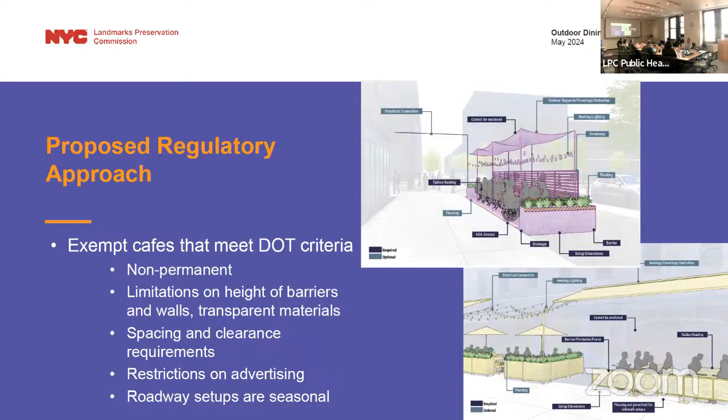As you saw at the hearing, DOT has extensive siting, design, height, and installation criteria for both types of cafes, as well as stringent limits on advertising. While sidewalk cafes can be up year-round, roadbed cafes can only be in place from April to November. Because of all these criteria and the seasonal, movable, and ephemeral character of the setups, neither sidewalk nor roadway cafes detract from the streetscape or significant exterior architectural features of the building. For these reasons, LPC's proposed rule would not require our review of sidewalk and roadbed cafes that comply with DOT requirements.

The proposed rules would still require LPC permits for aspects of outdoor seating that attach to the building or to historic paving, for compliance with LPC's current rules, and to make sure any penetrations and installations avoid damaging or concealing any architectural features. Elements that we would review would include awnings, lighting, conduit, etc. This type of regulatory approach mirrors our current approach to sidewalk cafes and also our approach to public pay telephones and Link NYC kiosks.

So now to address public testimony. There were several comments about outdoor dining setups that were raised and that LPC believes are already addressed by the proposed rules or by DOT's criteria. Quality of life issues came up, including noise, sanitation, and adequate access to sidewalks, and these were all noted at the hearing. These concerns largely fall outside of LPC's purview, but were the impetus behind DOT pursuing and adopting specific criteria for these setups.

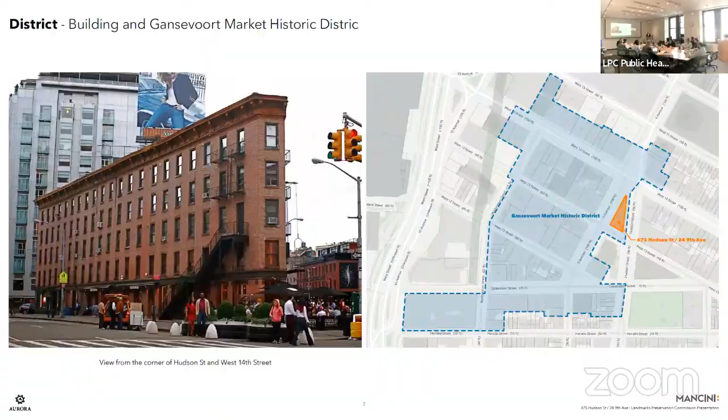The building at 675 Hudson Street, you can see in the historic district map on the right, bound on the south by 13th Street, on the west 9th Avenue, on the east Hudson Street, and then a small one-bay elevation, as you can see in the photograph on the left, on 14th Street, a prominent building on the edge of the historic district. An aerial view here illustrates its position, relatively low scale, but low scale in a district that is characterized largely by a lot of low scale buildings.

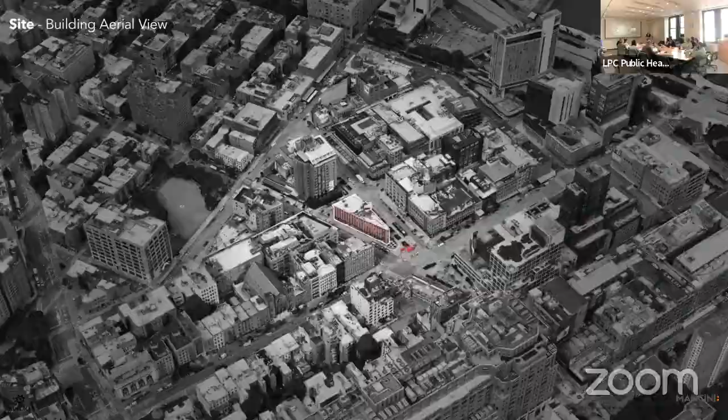Turning to two renderings now, of the previous proposal on the left and where we are today in our revised proposal. I'll remind the commissioners of some comments from the January public hearing. Significantly, there was a very consistent thought about the building becoming, quote, too sanitized, that there was a preference for more of a haphazard treatment to retain some of the messy character of the building. One commissioner noted that this building depicts the layering of time throughout the various elevations, and that was a positive.

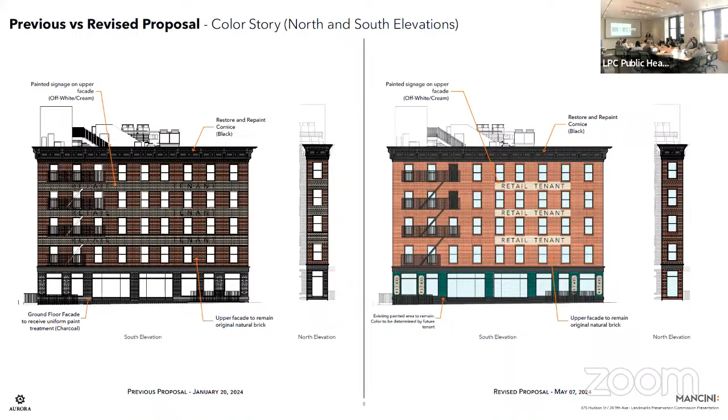The historic designation report for the district characterizes the evolution in four distinct phases: early development, the Gansevoort Market phase, the meatpacking district phase, and then finally the last phase, which is just called the present, basically 1970 onward. Each phase has a very distinct character.

The tenancy in the building in the late 19th and early 20th century were butter, eggs, and cheese distributors and other market uses. Then came the meatpacking district, characterized by a different sort of distribution tying into truck traffic and rail links.

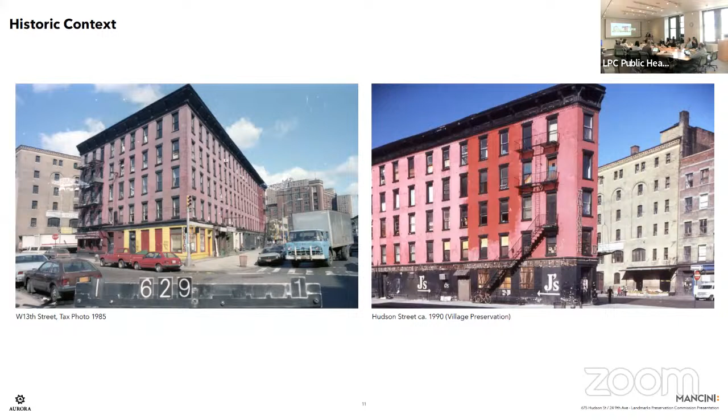The building in the 1980s had nightclubs across the base, had different uses on the upper floors. And of course, the vitality of the activity in the district was changing as restaurants were coming in. Florent came in the 1980s. It became a different place, but just as important.

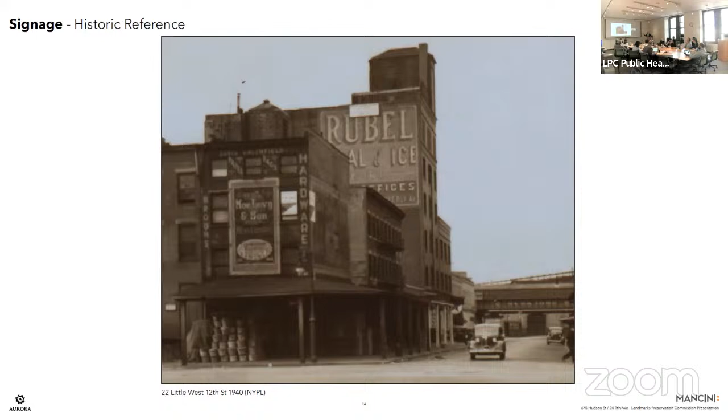And then this image here, looking west on Little West 12th Street. Obviously Rubel Coal and Ice, which was a major tenant in the neighborhood, had its giant wall sign on the side elevation, but more significantly, I think Mo Levy and Sons, this small scale building right on the corner, had painted signage both on the 9th Avenue facade across its entire facade, but also wrapping the corner on the Little West 12th Street side.

So wall signs existed on side elevations, but in this district in particular, wall signage extended across front facades, which was really about the activity that was going on in the district.

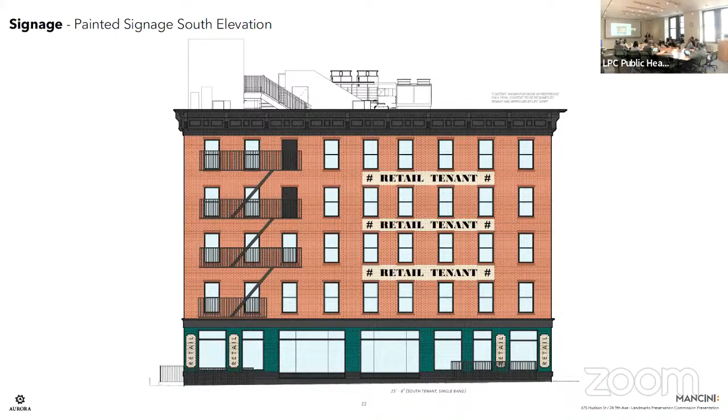Flipping around to the Hudson Street side, again, if there's a single tenant, the signage would be in this location, in each of these spandrels. One or two tenants, this arrangement. Again, one or two tenants, this arrangement. And then coming around to the 13th Street side, this is the exclusive arrangement. Again, prescriptive, limited, secondary to the overall brick masonry of the elevation.

And then finally, some specifics on the guidelines. So again, on the left are the specific guidelines and parameters for the wall signage on the upper portions of the facade, and on the right are the sign panels that would go in the piers at the base of the ground floor. So there are specifics about the dimensions.

On the left, a call out for the color, this Windham Cream, HC-6, which would be the back panel for the signage with a dark letter on that panel, specifics about its position relative to the lintels and sills above, and about the dimensions. And then on the right, the guidelines and parameters indicate either dark text on a light background or light text on a dark background to allow for contrast.

But again, to allow a little bit more flexibility at the base of the building as tenancies change. And then again, specifics about the positioning of those painted sections and the standoff from the jambs of the storefronts. So again, limited and also more prescriptive.

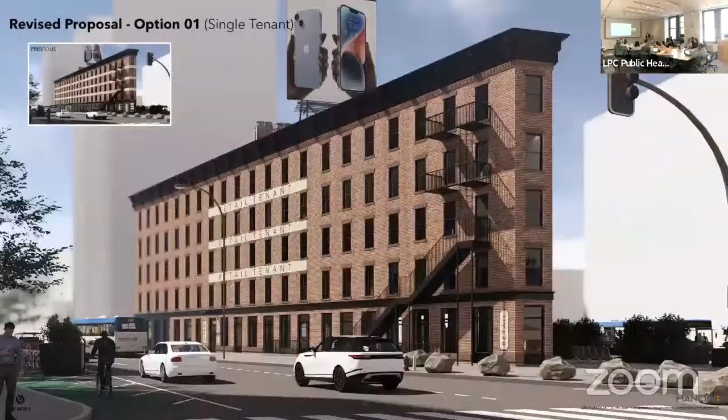And then finally, just a series of renderings going around the building. The little inset on the upper left corner is the matching view from the January public hearing, and then obviously the larger view is the current proposal. So looking south along Hudson Street, I think the reading of the building is primary here, and the interventions across the base are very much secondary, as well as those on the upper floors.

So this is a single tenant option here on the Hudson Street side, and again, a different color, just to suggest a range of colors across the base of the building that a tenant would be able to choose. And then continuing to the 13th Street side, so this would be a single tenant with 3 signs on each elevation. And then getting into the 2 tenant or 2 sign options here across the base on Hudson Street, on 9th Avenue, and then on 13th Street.

And then finally, the 3 tenant scheme, the 3 sign scheme with either a single tenant or 2 tenants, the view on Hudson Street, on 9th Avenue, and 13th Street.

So I think the changes that we've made have attempted to respond to your comments from January. Across the base, we've limited the amount of overpainting. This area of the building is currently painted, and that would be the extent of the painted masonry. We've reduced the number of enlarged openings, focusing them on the portions that face into the district on 13th and 9th Avenue, and we're considerably more prescriptive on the signage in the upper floors. All of this is an effort to reveal the layering of this building over time, but also to expose those changes and to introduce new ones in sympathetic and appropriate ways.

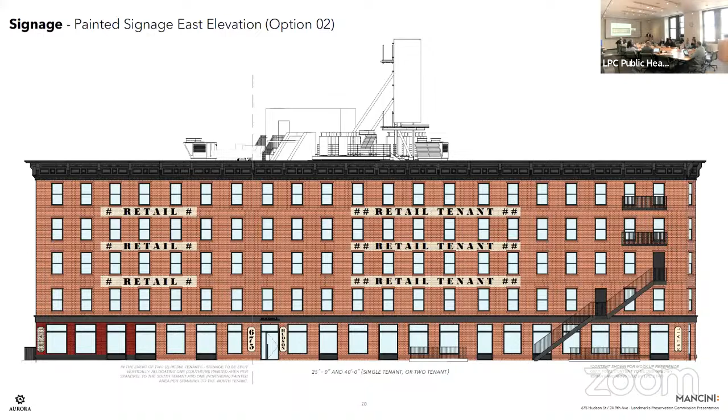So can you show me what that looked like? And also, are you sure you're going to get two tenants? It's likely one or two, likely more than one. So then one of the tenants can paint the bottom white and

the other could paint it green if they wanted. Is that correct? Could they paint their portion of the brick? None of the brick at the base of the building that is not currently painted will be painted. Okay, that was very specific. That was something you all felt very strongly about.

Right, back in here. So only the area here on 13th Street that is currently painted can be painted. Everything from this point north, which is unpainted, will remain unpainted. And down here on 13th Street, you can see it's actually a little more than what we're showing. So there's signage on all of these piers,

and here, and we're actually showing less signage than is there now, but this is sort of changeable painted signage, paint on paint, as the tenants change. And again, you all were very specific about what you wanted to see in terms of that signage, being good with it on brick down in the areas where it wasn't painted, and understanding that the southern 20% or so of the building, where it is currently painted, could be repainted. The idea is just to limit it to select areas relative to the tenants.

Got it. Okay, Vice Chair Bland.

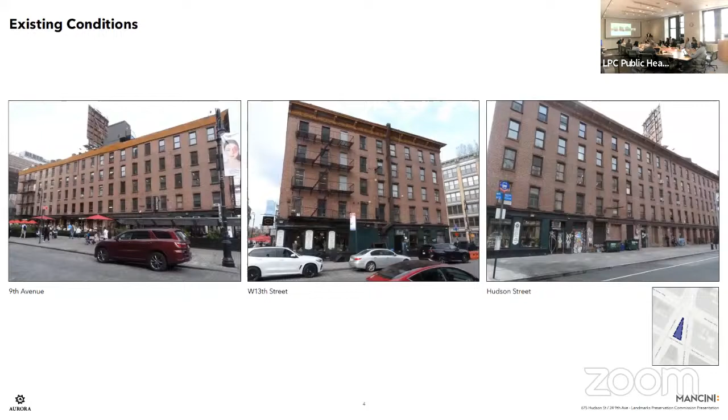Commissioner Ginsberg: One other thing, on the 9th Avenue facade, there seemed to be 3 entrances, and I thought the entrance for the above was not on the 9th Avenue facade. Am I misunderstanding that? So there are - this is the building entry.

Okay, so there's signage on either side, right. That's for this tenant space and this one. So that's anticipating 2 tenants, or at least 2 entries for 1 tenant. Yes, Commissioner Chen.

Since there's discussion about the sensitivity to sanitize a version, or the word 'messy' is the preferred term, or to regularize - does it make sense to eliminate the top band? Because right now you have this very modular, regular 3 bands across all the facades, which make it very, very symmetrical. Does it make sense to have the sign bands only on the lower 2 floors, the lower 2 bands?

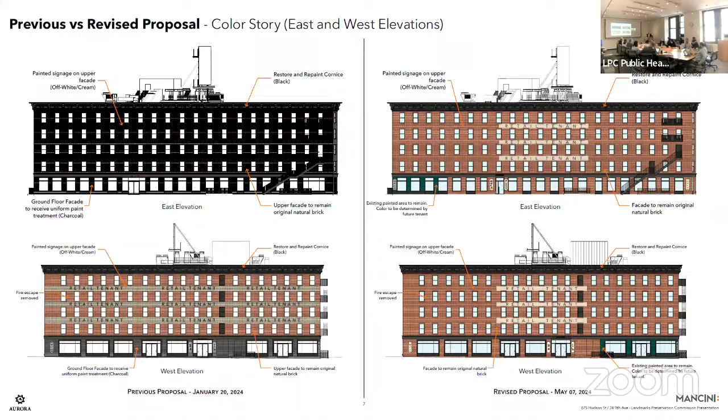I'm not sure that I agree that it regularizes things, and I think in this scheme where there are 3 signs - let me just go to the 2, sorry. I think the asymmetry of this actually adds a little bit of life and, let's say, messiness. So I think these signs, the way we've revised this now, are, in my eye, really secondary to the reading of the elevation. I think they will continue to be so, as a feature added to this field of brick. So I'm not sure that the 3 signs and the single tenant arrangement creates a sanitized reading.

I think you read the building and then it happened to be signs on it.

Following up on that, if a single tenant wanted to do option 2 or 3 on 9th Avenue, could they still do option 1 on Hudson? Or do they have to, like, is option 3 on all the facades?

Hadn't thought of that, but that's a good suggestion. I'm sure we'd be happy to do that because it actually allows for more flexibility. So if they wanted 3 signs on Hudson Street but 6 on 9th Avenue, we would certainly be fine with that.

Right, or maybe you can't have option 3 on all sides or something. Okay, other questions?

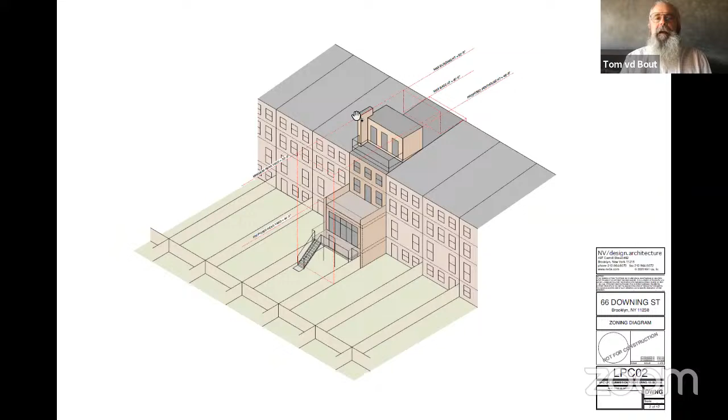So this is a little axon overview of what's being proposed. This is a view overlooking the rear yard. We have a penthouse on the roof and a rear yard extension of 2 stories. None of this, by the way, is visible from the street.

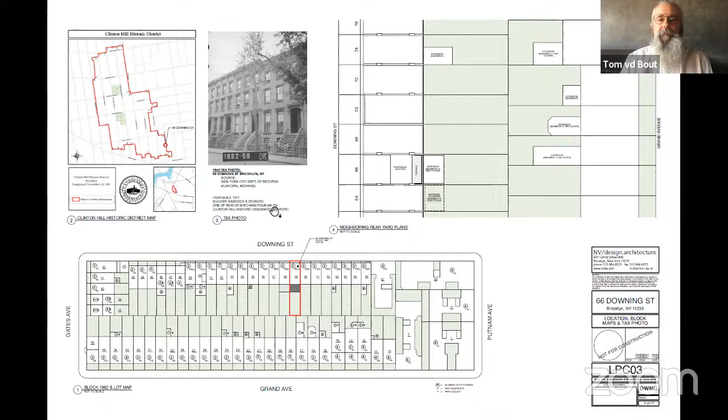So this is the house in question. It's mid-block on Downing Street. There is a row—it's the first in a row to the right on the screen of a long row that matches, and then there's a slightly different row going to the left on the screen. Across the street is a large schoolyard and school, and we're on the edge of the district here.

Our proposal extends the building to align with a proposal that was approved a couple months ago, I believe, maybe 3, for a rear yard extension at 64. So if and when that gets built, our extension would align with that one.

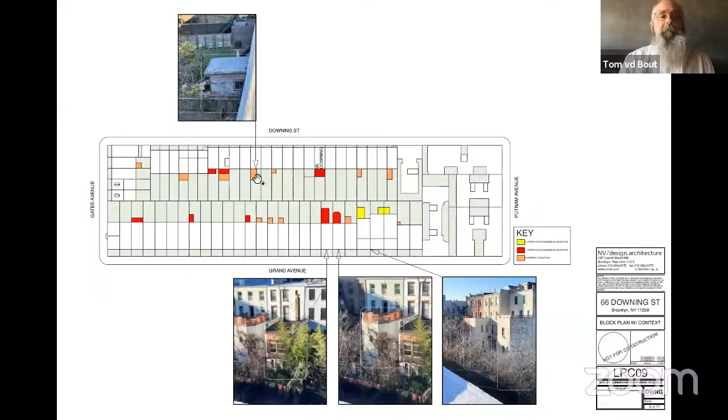So these are the views across at those extensions, which are 2 and 3 story, and then north to there's a couple that are deeper, but are lower further to the north.

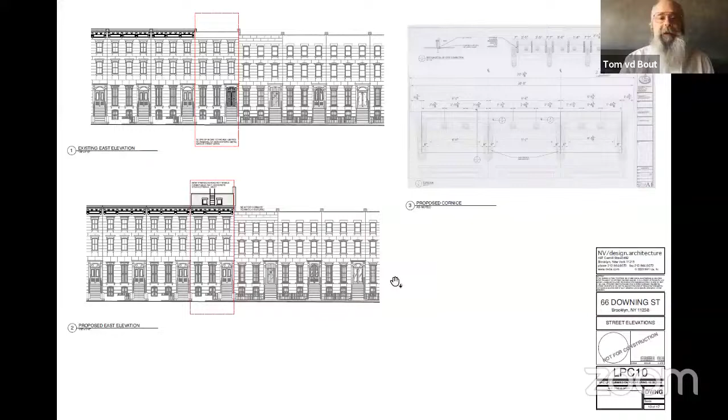So on the street facade, this is all being handled at staff level—the changes—but we're restoring a cornice and taking off the non-historic gate at the entryway at the top of the stoop. Nonetheless, the elevation here is set back. You can't see any of this, but there are 2 windows, the fireman's access, and the facade itself.

The rear yard elevation, where you can see the outline of what was approved but is not built—that elevation we're aligning to in terms of depth—and removing this portion of wall, putting in a big set of window doors, a couple windows at the back.

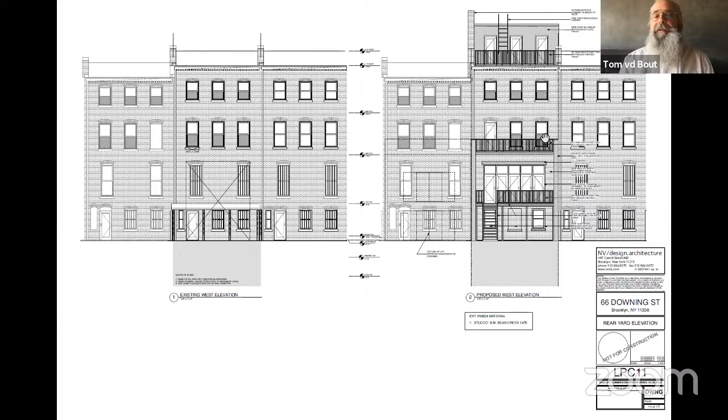We're hoping to reclaim the brick that we take out of the existing and build the wall with that reclaimed brick if we can. At the top, this is essentially a simple gray concrete stucco penthouse with 3 doors to keep it as light as possible.

That's the same thing, a little bit closer. One window expanded to a door for access to that terrace. And that's it—these are visibility studies. You cannot see any of it. You couldn't see the mock-up from the front.

This is showing the extent of our proposed rear yard addition.

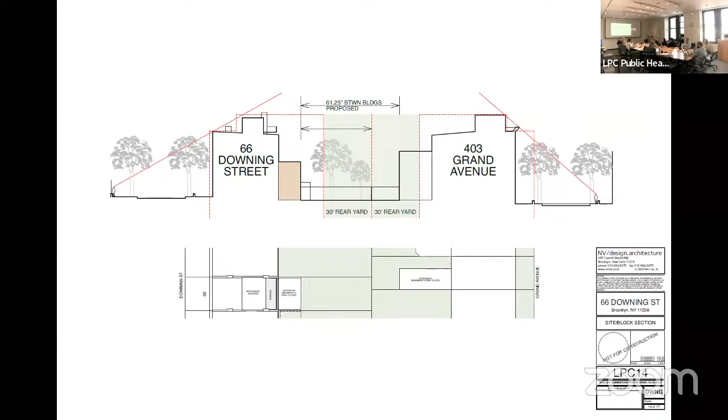And I think in that section, though, you were showing that you still have a more than 30-foot rear yard because the Grand Avenue extension is deeper than would otherwise be allowed, but we still maintain over 60 feet of rear yard space, the sum total. So it's still, we're trying to keep it pretty open.

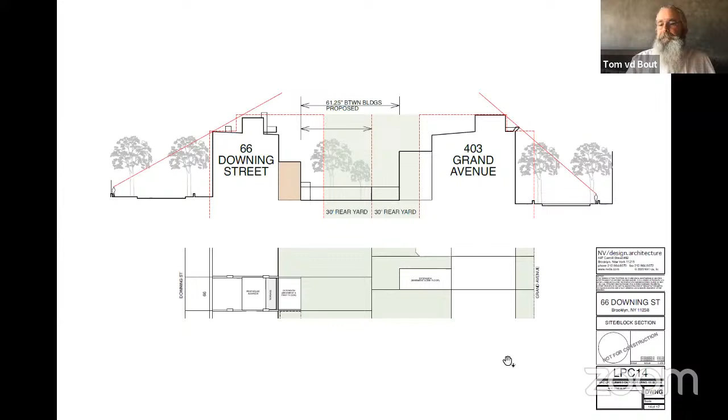Thank you. Any other questions? Commissioner Chapin, followed by Commissioner Gold. Are there other rooftop additions on this block? There are not. Across the garden, there's some higher buildings and assemblies of things on the roof, stair bulkheads, solar panel arrays, that sort of thing. But on this end, you have to go all the way down to the other end to find a stair bulkhead.

Okay, thank you. Commissioner Jefferson. I just have a material question. Under section LPC 07, you call out stucco, new concrete stucco wall. Is this CMU you're using on the walls? Yes, on the cheek walls. Okay, thank you.

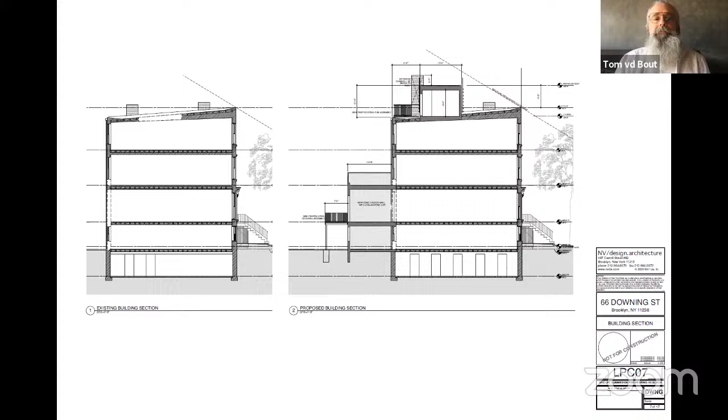Okay, any other questions? All right, let's move to public testimony. Is there anyone in the room who would like to speak on this item? Not seeing anyone, I will turn it over to Gregory Kala to see if we have any remote participants. Thank you, Chair Carroll. I do not see any remote participants with their hands raised. If you would like to speak on this item, please click the raise hand button now. Okay, none of the hands are raised.

I will just note for the record that Brooklyn Community Board 2 recommends approval with the suggestion that a cornice be added to the building in line with that on 68 Downing. We also received a letter recommending approval from the Citizens for Responsible Neighborhood Planning of Clinton Hill and Fort Greene. And I will bring it back to you, Chair Carroll.

Thank you very much. So I think the testimony was supportive. Is there any final comment you'd like to make before we begin our discussion? I think, no, I'm fine. I was just unmuting there.

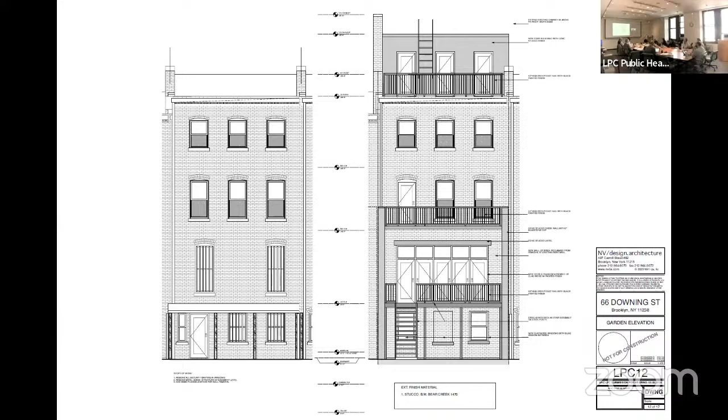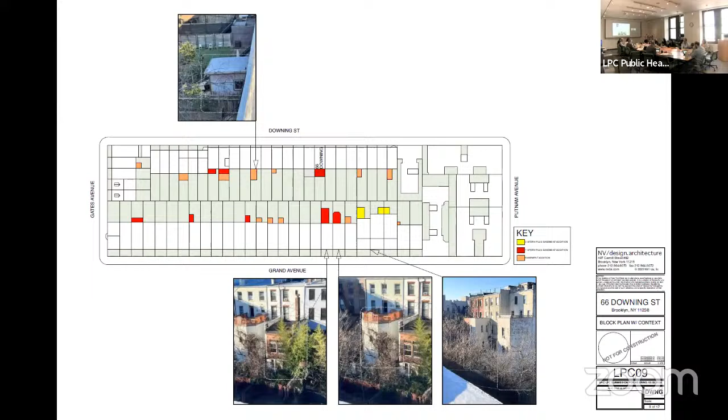Sorry, I am just looking at the aerial photo of the block, and I know that there have been some applications where some commissioners have been concerned about approving a rooftop addition where one doesn't historically exist. But I want to remind everybody that the rule would allow, if this were coming in just for a rooftop addition, the rule would allow the staff to approve a rooftop addition, even if none existed on the block. And so, understanding that sometimes this issue does come up, I want to note that looking at the aerial photo, it does seem like there are a variety of building types and heights, and some rooftop accretions like bulkheads, but also some partial top floors that kind of read as additions. So I don't think it's as pristine as some other places where we've discussed this.

But I don't know, Tom, if you want to add anything to that roofscape analysis. I think that's right. You can see, especially toward Putnam Avenue, it becomes extremely varied and grows in height. And we did design our proposed penthouse to comply with all of the landmark rules for a staff approval. We just got caught doing the rear yard addition too.

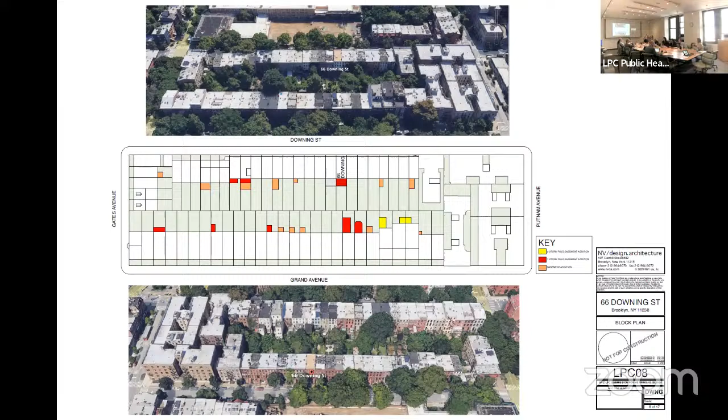Right, so really the reason the rooftop addition is before us is because it's being proposed in conjunction with a rear yard addition, and so we look at the cumulative effect. Okay, so let's close the hearing and begin our discussion. Commissioner Jefferson, would you make a motion to close the hearing? So moved. Thank you. Commissioner Chapin, would you second that motion? Second. All in favor, say aye. Aye. Any opposed? Okay, the hearing's closed and we'll begin our discussion.

This is an application for both the rooftop and rear yard addition. Neither are visible from the public way, and we're reviewing them because the staff is not authorized to approve one where there's another approved or requested addition. And so we're looking at the cumulative effect on the building. I think also the number of two-story additions is smaller than is required for a staff approval.

But the applicant has shown us that there are other similarly sized additions. In addition, we've approved a two-story addition on the adjacent building that projects as deeply as they're proposing. And also the Downing Street side of the block has much deeper rear yards than the other side, the Grand Avenue side of the block, which can also be taken into account.

All right, we'll start our discussion. Commissioner Chu, would you like to start this one?

I see this proposal as perfectly appropriate. The cornice is in fact listed on the drawings to be added back, so that is part of the proposal. I think the rooftop mass is pretty minimal, and considering the other types of heights in the block, I think it's acceptable. In terms of the addition, these houses on this block have smaller house depths than Grand Avenue. The addition will do a lot more for them in terms of adding needed area, and they're not even using the full depth of the lot that's allowed. So yes, I think it's appropriate.

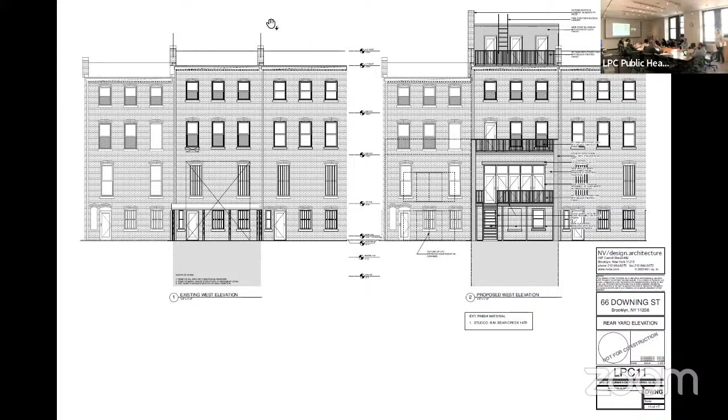So that's approved. Thank you. We'll move to the next item. Next item is public hearing item number 2, LPC 24-08873.

An application for a certificate of appropriateness in the Borough of Brooklyn, Block 5115, Lot 1, 1100 Albemarle Road, aka 101 to 113 Stratford Road, in the Prospect Park South Historic District. This is a neo-Georgian style house designed by H.R. Ferguson and built in 1909 to 1910. The application is to construct porches, alter facades and openings, connect the garage to the house, and place paving at the driveway.

Morning, everyone. Good morning. We're here today to present to you 1100 Albemarle Road, at the southwest corner of Stratford Road. The Wilsons are here — Summers, Andrew — this is the Wilson family home, they're currently living there. They bought a fixer-upper, and we're thinking through what the plans are.

Can you hear? Oh, we're having trouble. All right, got it. Can you hear now?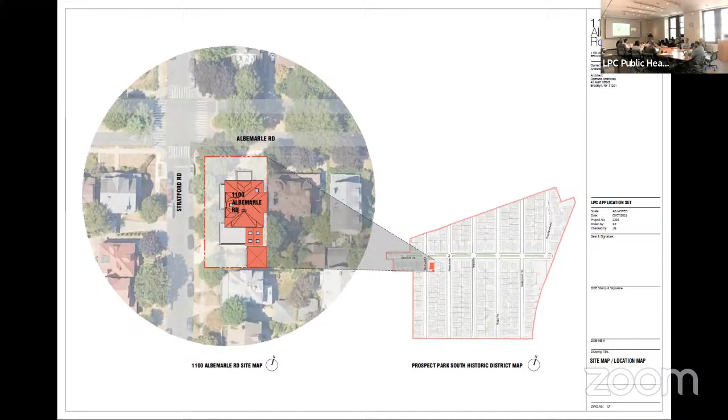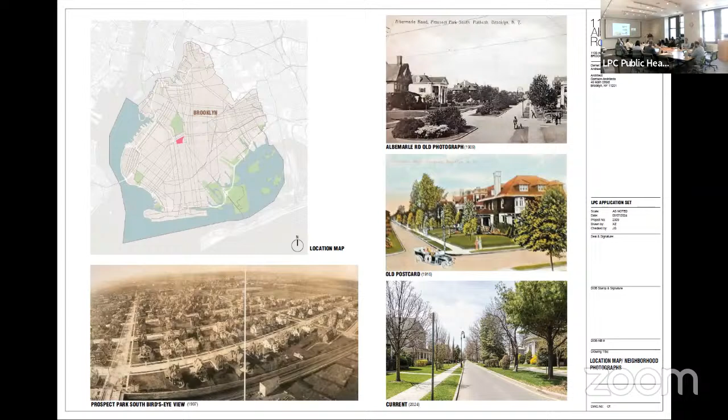All right, so here's the house shown at the corner of Stratford and Albemarle. The red zone is the original house. You can see the extents of the lot, and the district — I imagine you've seen all kinds of houses in this district over the years, so I won't go on about that. But here's a bit of context, and in that center image on the right, almost the house we're looking at, although not quite the same — but the character just goes to the character of the streets and surroundings.

This is the house in its current condition. You can see that certain pieces and parts are listing a little bit. That porch was rebuilt from the original porch, put up with fewer brackets than the original had. It's a neo-Georgian house, a little high-waisted at this point because the bricks come up quite far on the elevation without its porch. But if you look closely, you can see all kinds of things are displaced and canted and in need of work. Every surface is in need of some attention.

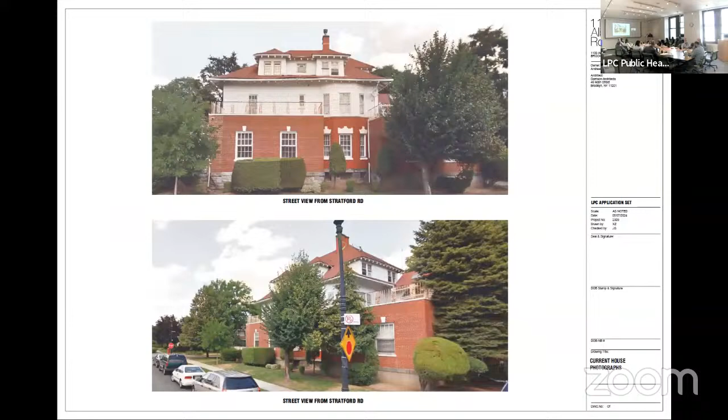In the 50s, there were a series of additions made. The porch was replaced with a brick bump out, and some openings were made in the wall of the original house, and that's what you see here.

More images, Stratford Road crossing. Brick additions.

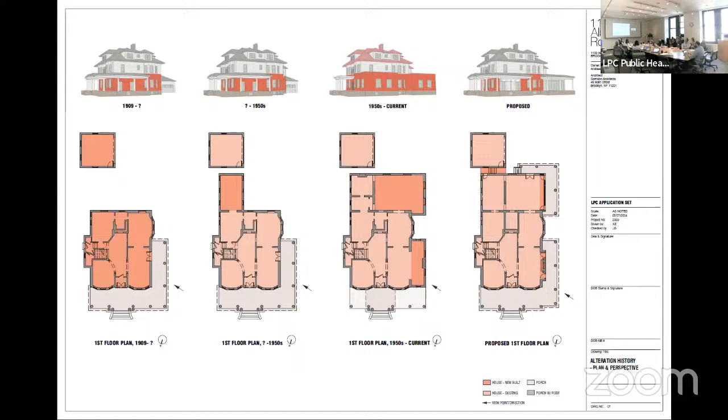So the existing house on the left, the blue shows the removals, the demolition. The right shows our proposed porch restoration. We set the corner of the porch back a bit to restore the symmetry.

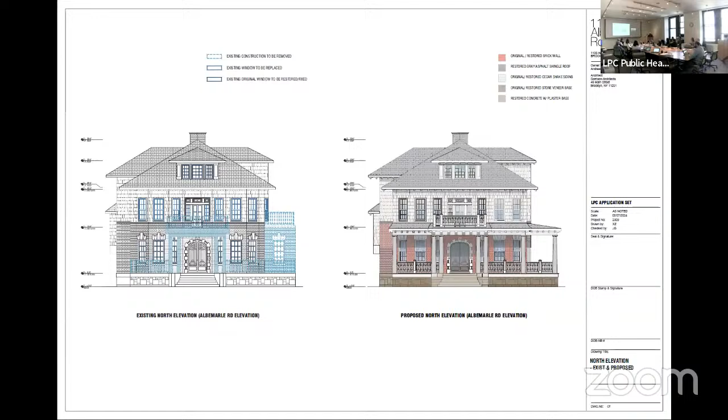Again, the same business with a bit more detail and in plan. You can see the existing porch on the left is the red at the bottom. The brick boxes show at the left-hand side here, and we're basically removing them, doing work to the back edge, and then doing work.

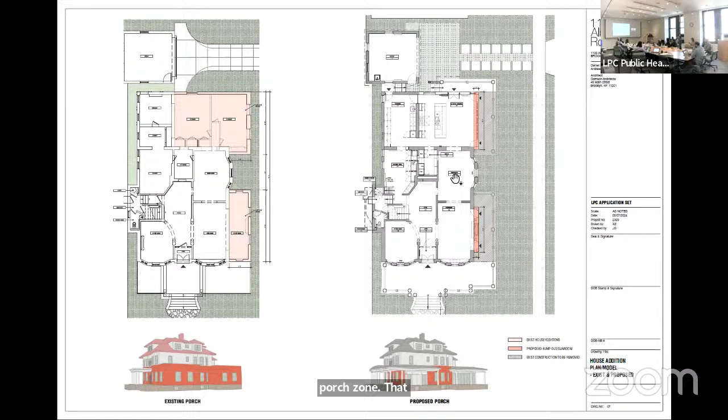Again, more detail. You see these are the projections into the porch zone that we are proposing, a bit more space for these rooms. You see the dining room has a bit of a bay, which helps it a bit. This is about 13 feet.

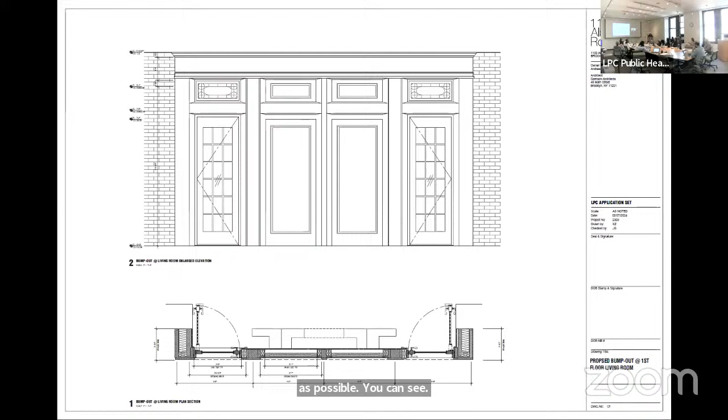Details, which I'm sure you'll want to see, but the basic construction of the porch roof in the traditional manner, using historic components that match as closely as possible - you can see in our photos. The projection at the living room, containing a alcove fireplace, is similar, and the solarium windows at the kitchen, which are double glazed and top of fixed light.

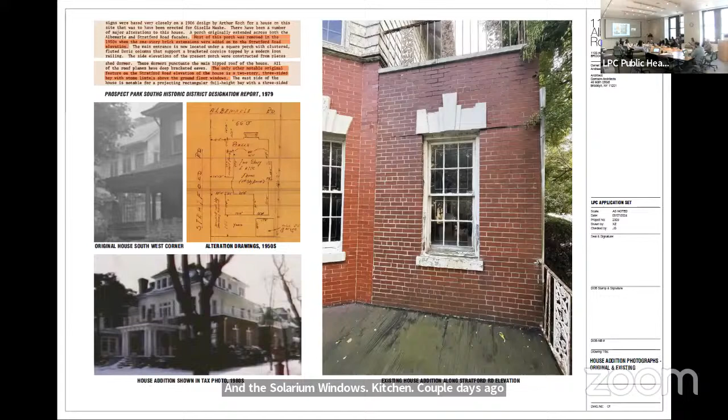So here you can start to see the condition of things. The lintels are rusted, the brick's displaced. This is all on its last legs. The water drainage system for the house, of course, cut off, pouring around foundations. It's already been hard at work to restore that.

We talked a little bit about the business of the bump out and the solarium and so forth. It is something that we see commonly throughout the neighborhood, a variety of modifications.

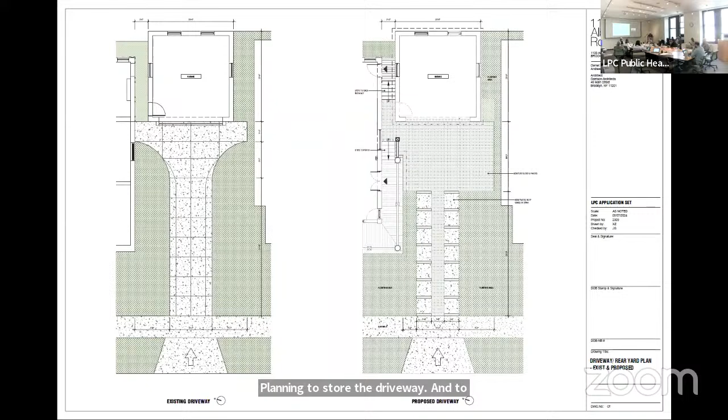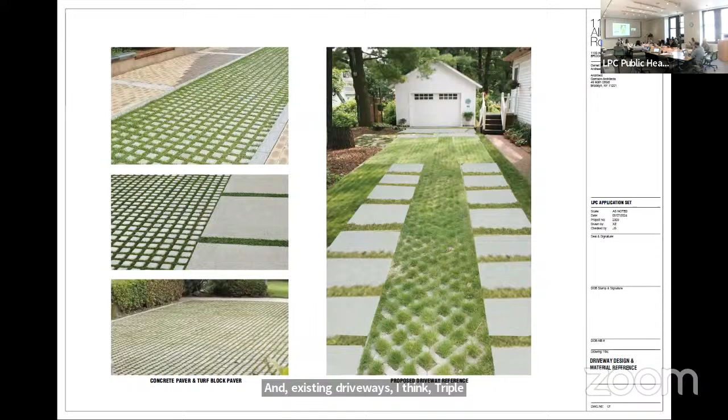We plan to restore the driveway and two concrete block pavers leading to a grass block central area. Driveway as it is, various driveways, historic examples on the left, tracks, and existing driveways. Our plan is to use grass blocks in combination with these blocks, so it becomes usable for a variety of things.

And the elevation, this is the south elevation of the house. This is one of the 1950s additions. We're going to keep some of the framing, but we'll take the extension away. We'll do a bit of work on the windows. And what we show is wrapping the porch partway back.

The garage starts about here, and we would make a glass, wire glass connector, what's called, between the garage and inside the house here. Place a door here, so we can basically come out of the house, undercover, and into the garage under the glass. Here's an example of the kind of thing that would be. It just goes basically edge to edge, upseal.

And some more of the drawings here showing the detail of the house, the lime brick mortar, beautiful original brickwork.

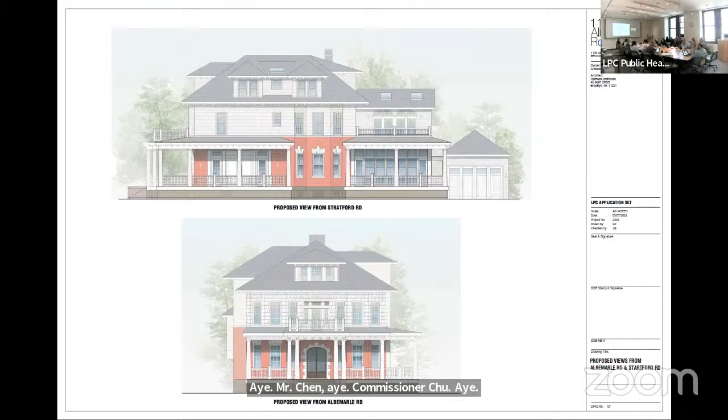Second. Chair Carroll, aye. Commissioner Bland, Commissioner Chapin, aye. Commissioner Chen, aye. Commissioner Chu, aye. Commissioner Ginsberg, aye. Commissioner Goldblum, Commissioner Jefferson, aye. Commissioner Lutfy, aye. Commissioner Master, aye. With 10 in favor, none opposed, the motion passes.

All right, that's approved. Thank you very much and good luck. And we'll move to the next item.

Next item is public hearing item number 3, LPC 24-08399, an application for a certificate of appropriateness in the Borough of Manhattan, Block 231, Lot 1, 301 Canal, 419 to 421 Broadway and 423 Broadway, all in the Soho Cast Iron Historic District. A taxpayer built in 1955, a restaurant and shop, and a modified federal-style store and dwelling built in 1822 to 23. The application is to demolish 2 of the buildings and construct a new building at the corner, and to construct an addition, install the storefront and signage, and modify the fire escape at 423 Broadway.

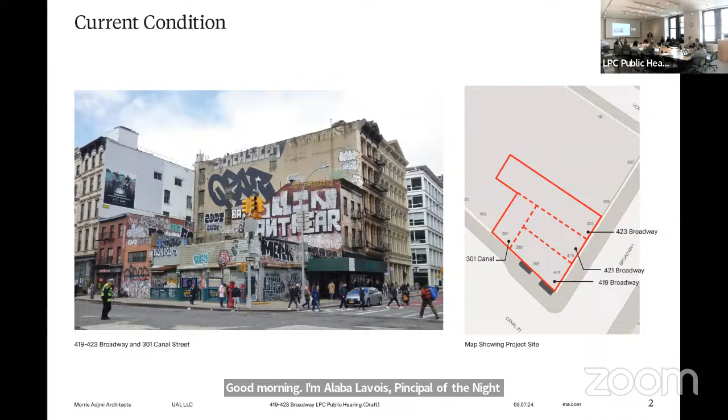Hi, good morning. Albert LeBose, principal of United American Land. We have this site, we bought it pre-COVID, and we designed this beautiful building, a Morris Adjmi design.

And since it was pre-COVID, unfortunately we designed an office building. I don't have to tell you where the office market is and where the financing for the office market is. So I'm kind of embarrassed coming back here to say, hey, we have to change gears and we can't build this building. We have a very big interest in Canal Street on a couple of the corners and other properties, and this particular site has been blighted for a while.

So we thought, let's go ahead and build something as a placeholder, like a one-story, beautiful, gorgeous retail building that we can all be proud of, and come back and fight another day when the market comes back and we figure it out somehow. With the rezoning, people ask me, why don't you do resi? But given that the site is pretty small and constrained, interest rates are where they are, and soil conditions and all that, it doesn't make economic sense for us at this moment to do a resi building. So with that, I'm going to turn it over to Erin. Thanks.

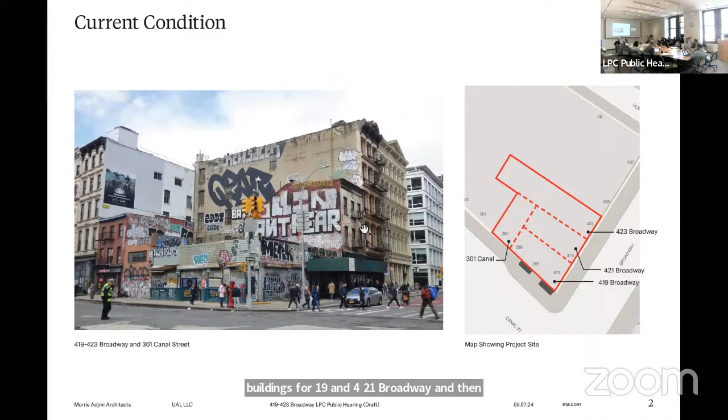Morning, Commissioners. Erin Ruley, Higgins Quasebarth and Partners. So what we're looking at today is 419 Broadway. It's actually a collection of 4 buildings that are an assemblage. It includes 301 Canal Street, this two-story orange brick building, the one-story commercial structure on the corner which was originally two buildings, 419 and 421 Broadway, and then 423 Broadway, which is a three-story late federal period building that was converted and added onto in the 1860s. They all occupy the northwest corner of Canal and Broadway in the Soho Cast Iron District.

As Albert introduced, this was the approved project in 2017, a commercial 8-story commercial building. It was a special permit project because that was prior to the Soho rezoning, and it was a 74-711. It included the restoration of 423 Broadway, which we see right there. That project was not realized, and the permits expired in December of last year.

So what we have today is a proposal that essentially reclads the existing lower structures, the 419 and 421 buildings and 301 Canal. Those were buildings that were approved for demolition under the prior application, and the design is inspired by the cast iron bases that we see throughout the district.

And it's a very typical Morris Adjmi play on the historic features: fluted columns, projecting storefronts, and decorative patterning. 423 is also part of the project, remains part of the project, and that'll be restored largely in the way that we had proposed under the 74-711.

New commercial storefront. It'll have a continuous commercial space with the 419 building. The upper two floors will be converted for residential. There's a rear extension, two stories, that will be preserving the pitched side wall of 423, and the addition is set back slightly so it slides behind the plane of the brick that you see here.

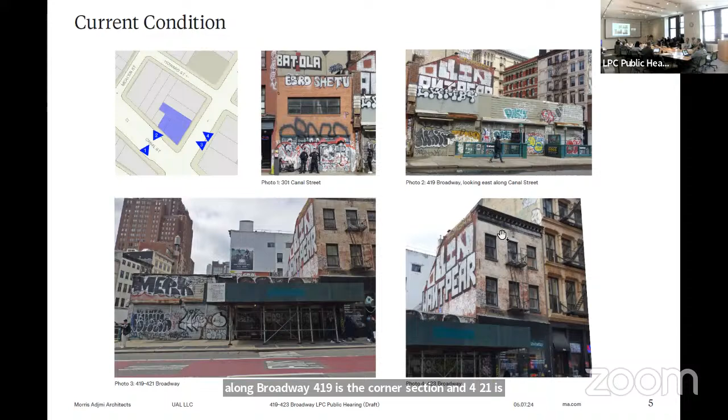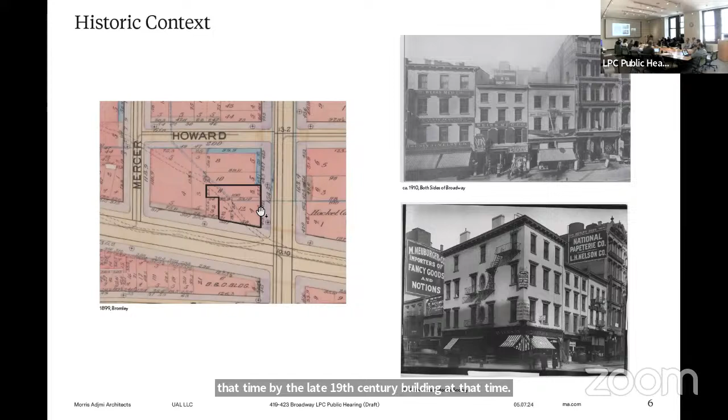The buildings started out as 4-story Italianate structures in the mid-19th century. You can see this is 419, this is 421, and this is 423. In this corner view, we have that same perspective, but it also includes the original 301 Canal, which was a 2-story mid-19th century building at that time. By the late 19th century, 419 and 421 had been combined on the interior, and so we see that in the map from 1899 - it shows it as a single footprint.

In the 1950s, 1953 to be exact, the upper 3 floors of the 419 and 421 buildings were demolished, and it was left with a converted base that gave us the condition that we have today. So storefronts all along Broadway and Canal, and then the span, what had been the spandrel became the parapet, and clad over in a series of metal and contemporary finishes at both of the buildings.

In the background, you can see 301 Canal. In 1966, that building was entirely refaced, and all of the interiors really date to that period as well for that building. And then, of course, this is the designation photo. So in the early 70s, the district is designated, and this is the condition we have had since then.

In 2017, the commission approved demolition of the 419 building and 301. These are current photos, but also probe photos that we included in the 2017 package, to explain the conditions of the buildings. And the commission found at that time that the buildings did not bear any resemblance to the historic buildings that were originally there, and that there was no significant historic fabric remaining at the buildings.

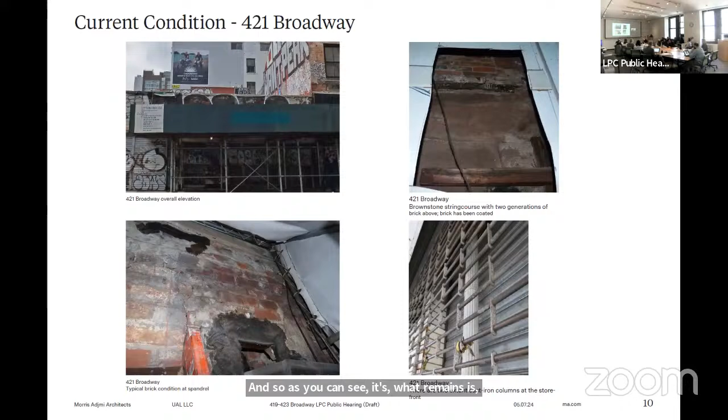And areas of brownstone, fragments of brownstone that remain. There are two cast iron columns within the opening of that bay, and these would have been interior columns within a projecting storefront. So largely the same condition that we see at 419. As you can see, what remains is compromised and fragmentary at best. All of this was the same content that we presented in 2017 as part of the original proposal.

So just stepping back to the site to consider how to think about developing a new one-story building. It has been so long occupied by a one-story building, and how it might engage in the conversation that currently goes on. So we looked at the corners throughout the district and how they evolved.

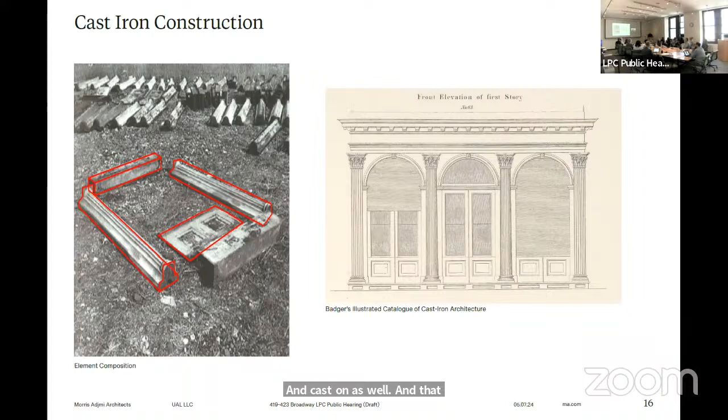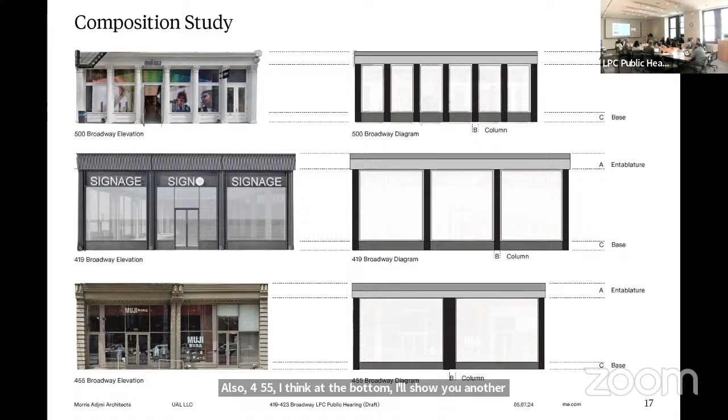We did some studies of other buildings, just the base spacing, and also the one in the center is our project, which has about 18 feet 8 inches base spacing on Canal, and 17 and change on Broadway. Also at 455 at the bottom, I'll show you another image of that, which had projecting storefronts originally, similar to what we're doing, but those were heavily modified.

And then here's some images. So the model is circulating. We looked at this as just a series of bays that had columns and a beam or entablature, and rather than replicating existing cast iron architecture, we looked at the architecture as a way to inspire us.

No? Oh, okay, I'm sorry. It's okay, it's all right. Yeah. We'll put it back together.

I think it really helps to see the depth of the facade and the articulation, and also the components, which is something that we felt was important. Even though this is a small building, we put a lot of care into how all the pieces went together, and we think that it addresses the appropriateness issue through that attention.

Here's the column concept. We looked at catalogs, images, and architecture in place, and came up with a modified fluted column, which has a folded section. All of the metal in the building we're proposing to be cast aluminum with a paint finish, which would replicate the sand finish that you would see in cast iron.

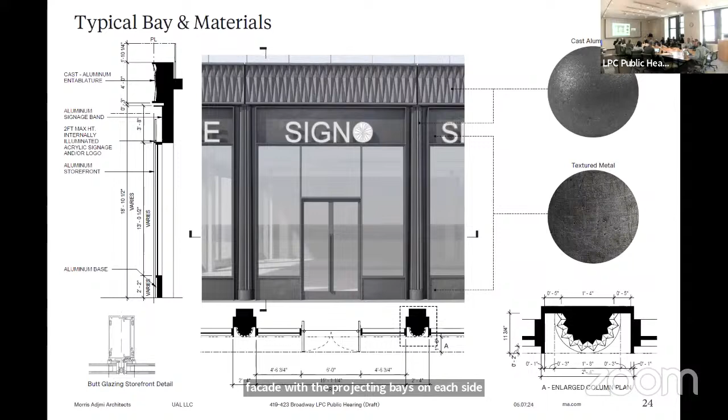One of the things that we really wrestled with is that we first looked at this as a 3-story building and then a 2-story building, and all of the vertical circulation that was required was really knocking out a lot of the usable floor area. So we landed at 1 story. We're trying to find the appropriate height.

And that's the proposed design. Karen's going to give us a little more information about the 423.

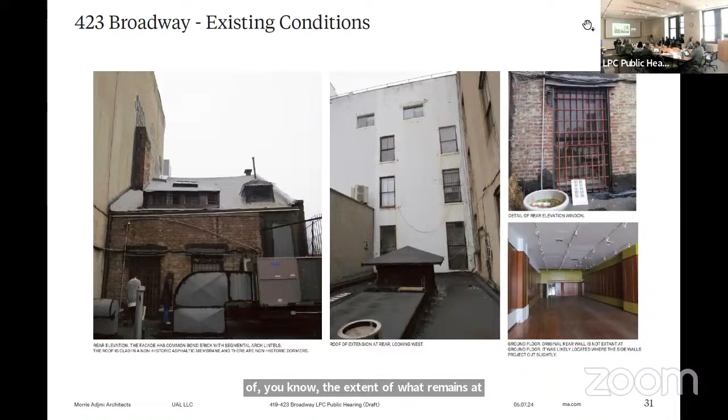So that'll be replaced as part of the overall restorative scope. And this just gives you a sense of the extent of what remains at the rear wall, the amount of coating that comes up off of the roof level, waterproofing and around the openings. So the proposal fully restores the building, includes new historicizing storefront, a combination of wood and metal.

We'll look at the details. Where necessary, sills and lintels will be replicated in cast stone to match brownstone. All of the facade will be stripped, brick repair, repointing, standard scope of work. And here you can see the baskets of the fire escape will be retained and the ladders removed.

Details of the storefront, a new cornice, it's going to have a nice projection on it, carefully detailed, and CTS are the architects for the preservation work. A new 2-foot tall sign, internally illuminated along the frieze.

The retail entry will be on the left on the south bay, and then a new storefront display window, and then the residential entry to the north. The storefront itself, the pilasters and piers and bulkhead will all be wood, but the windows and doors will be aluminum in that system.

And we can see it in the plan here. So this is the commercial entry that can take you into all of the commercial space, and then the residential entry that will take you upstairs.

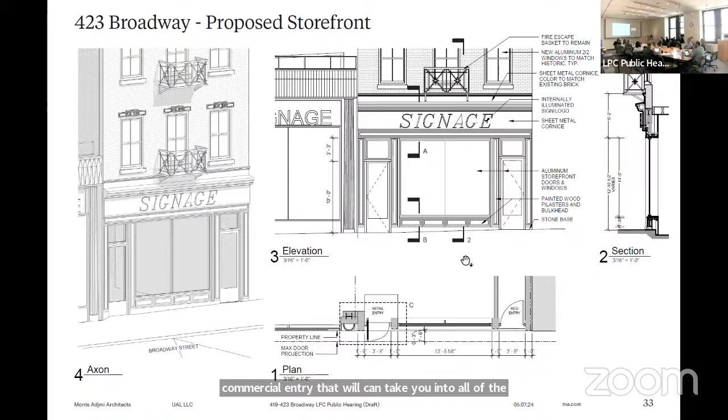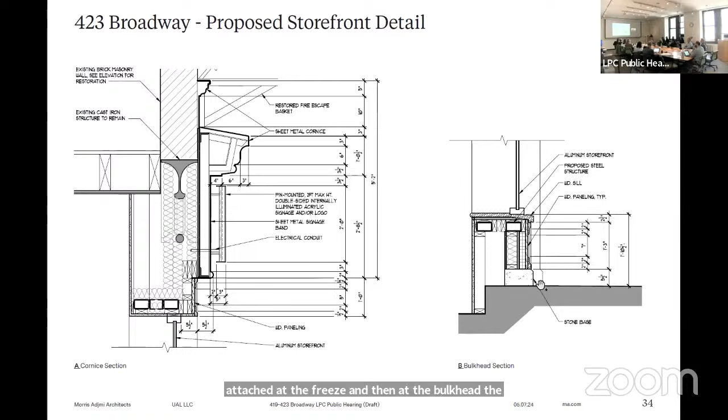Here are just to give you a sense of the details of it. The projection of the cornice, so it's going to have some real depth and texture to it. That illuminated signage is directly below that, attached at the frieze, and then at the bulkhead. The bulkhead is 20 inches high, wood recessed panel detail sitting on a stone base.

And then in plan, we can see the 419, the new column for 419, the pier of 423. So this will be the extent of the masonry wall that's retained, the new paneled pier at the end, wood paneled, and then pilasters with that same panel detail in the storefront.

So it'll be inspected by an engineer, and everything will be stripped, brick repairs done and repointed as part of that stabilization. The coping stone will be replaced with new brownstone to match, new cast stone to match brownstone. And based on the conditions, we think that these upper few courses of the parapet are going to need to be reconstructed just based on the level of deterioration.

And then there are two chimneys that are up against the wall at 425 Broadway, and those will be removed as part of the project. And I think, so Morris will take us through.

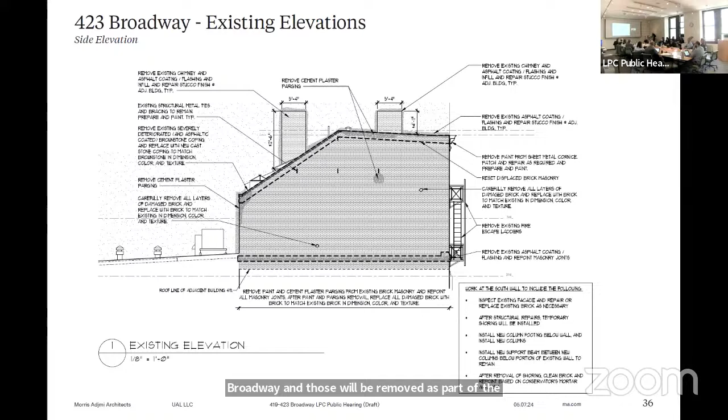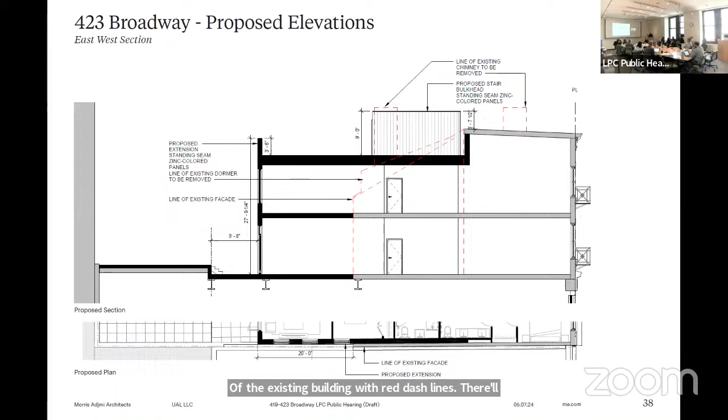And then 2 other issues that we're working through, and we've appealed to FDNY, one of the captains at FDNY, to eliminate the handrails both on the roof of 423 as well as on the corner building. So hopefully those are 2 separate requests, one may come through or both.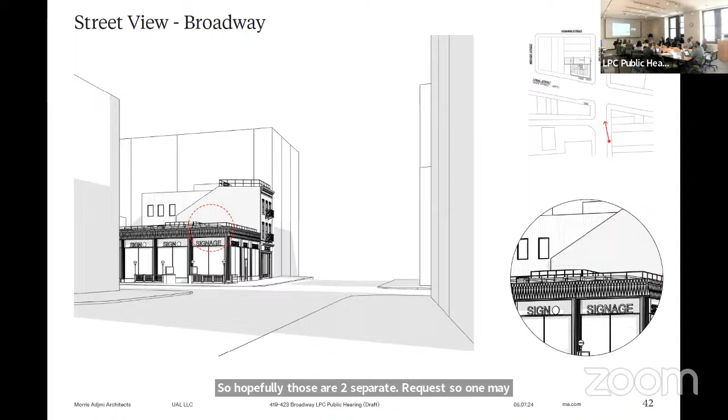Hopefully that'll happen. And here are some visibility studies just to show the equipment and the rooftop for both buildings. The handrails set back from the facade, but we're also trying to. We looked at just raising the parapet, but it just got to be too heavy.

That's it. Great, thank you. Thank you. All right, questions?

Commissioner Chu: So the lot line brick wall between the brick building and the corner, is that being removed to join the ground floor all the way across? Yes, when we get the plan up. Yeah, that might help.

So is it one large retail space? I think the idea is that it can function as one, or potentially as two, but they want the flexibility. So the signage could be the same name on that storefront as the corner building? Yes.

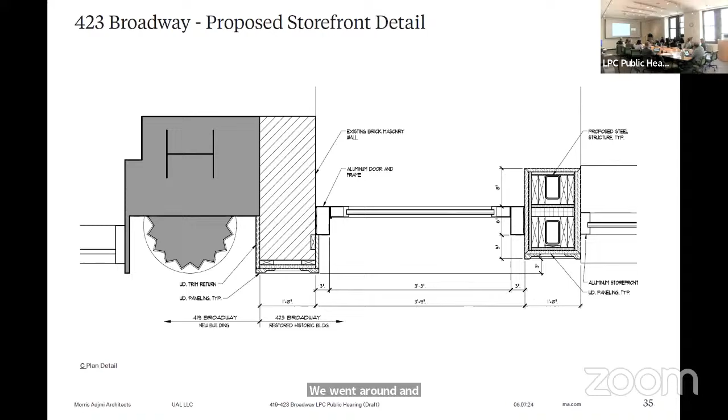So the spaces are linked, but you obviously decided to pop up the height of the corner building. Could you talk about your thoughts behind that? We went around in circles. I know the height was something you worked on, I just wanted to hear your thoughts. No, I'll get to the render, sorry.

It was a balancing act between a building that felt too low if it aligned, and we felt that—if you look at 423 here, and this is 305, 303—they look like they're two different scales. The floor to floor heights are very tall at 423, so we were trying to find a balance between those heights, and this is where we ended up. It's actually at the height of where 301 Canal is now, right? Exactly, it's two inches tall.

All right, other questions? Commissioner Jefferson: Your building at the corner is really well done and composed. From this view, it seems to me that the existing building, you made it into two facades, right—the gray one and the red one—and it's kind of a collage. I'm wondering, conceptually, why not just make it all gray to be a backdrop for your beautiful building? Why the issue of making it two facades in the back that you can see from this view? I think it's a great question.

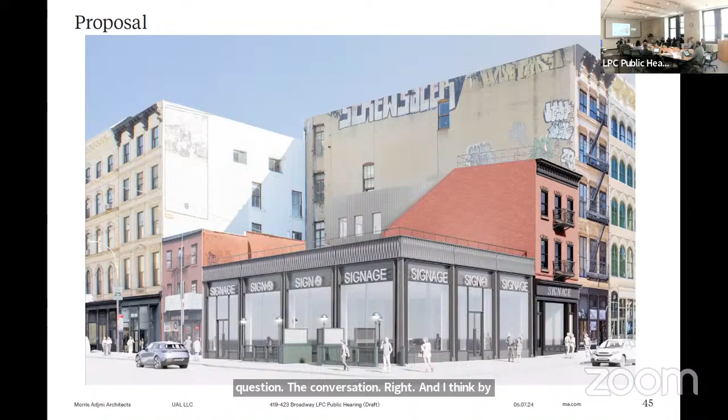I think maybe the answer is that we could paint the brick. We wanted to have a record of the party wall there, the side wall of the building, but I think we did that by changing the material. If we were to paint the brick a similar color to the metal, you'd still see the metal recessed behind it, a different material and texture, but it would function more as a backdrop—I think that would be a good solution. We didn't want to replace all that material or do it in brick. No, I understand, it's covering it up with the material. But I'm questioning the composition. Right, no, I think by making it all the same color, that would achieve the goal of making it more of a backdrop while reflecting the existing condition and the new proposed design.

Other questions? All right, I don't see any other questions right now, so we'll move to public testimony. Is there anyone in the room who'd like to speak on this item? Not seeing anyone, I'll turn it over to Gregory Kalla to see if we have any remote participants. Thank you, Chair Carroll, we have a couple of remote participants with their hands raised.

The first we'll be hearing from is Christina Conroy from the Victorian Society of New York. Christina Conroy, I'm promoting you to panelist right now. Please unmute your line and state your name for the record, you'll have three minutes to speak. Thank you. Good morning, Commissioners, I'm Christina Conroy for the Victorian Society, New York.

The Victorian Society is happy to support the proposed work at 423 Broadway. The planned restoration will bring this important early 19th century building significantly closer to its original appearance, especially as seen from Canal Street. While the rear yard addition will be visible above the new building, it does not appear to be obtrusive in this context. We also support the demolition of 301 Canal and 419 and 421 Broadway. We support, in theory, the construction of an obviously 21st century building if it is designed in a manner that supports the specific character of the adjacent buildings, the streetscape, and the district. In many ways, we feel the proposed building does.

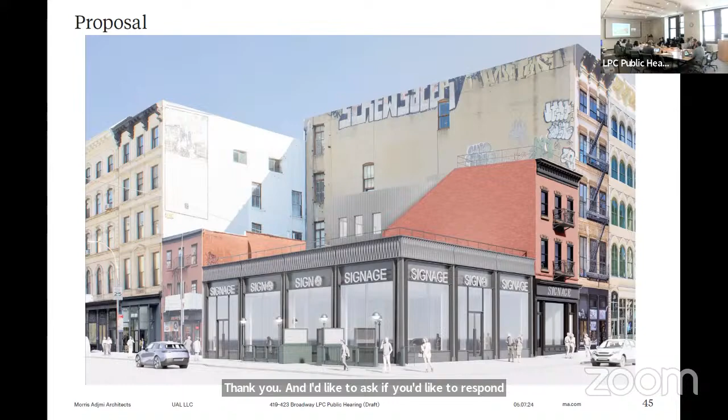Thank you. So I just want to go back to a couple of these slides. First, I think just to address the Victorian Society's question about the columns: those columns were, of course, part of the approval to demolish in 2017. They are very small columns, and they were originally interior columns. These would have all had projecting storefronts with the column within the storefront bay, so it has not been incorporated into the design.

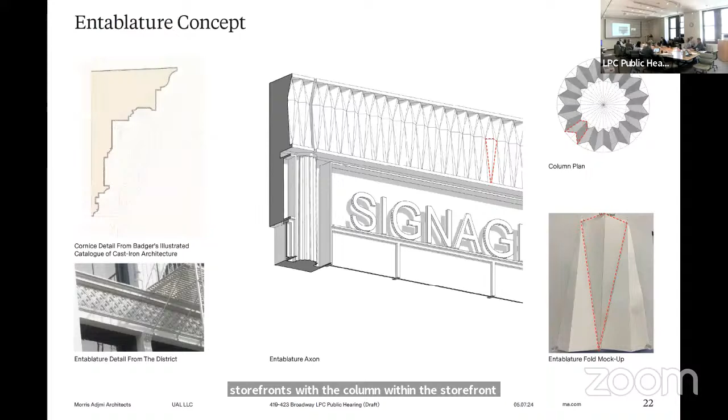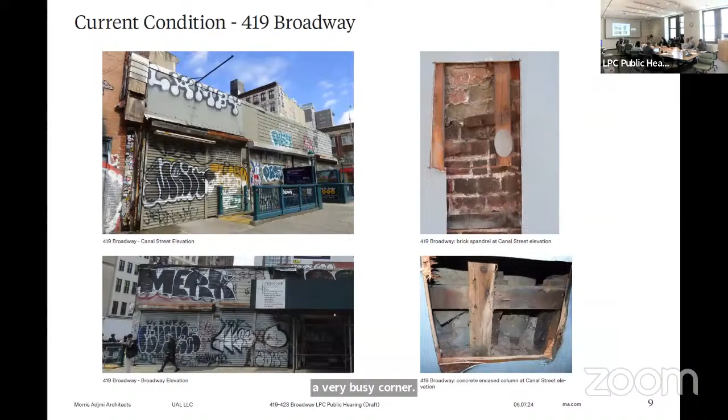Going back to the questions of scale that were raised by both VSNY and HDC, it's a challenging site. We have the two large subway entries along Canal, and this is the current height of 419, and we're matching the height of 301. You need some amount of presence on this corner — it's a very busy corner. I think the model is really helpful because it gives you a sense of scale that the rendering perhaps doesn't, and it all feels a bit more consistent, whereas in the renderings it takes on maybe a life of its own. But again, the idea is that we have to try to rise above the level of the existing subway entries and then have a properly proportioned building.

I think the scale is one of the inherent characteristics of Morris's work. He takes those elements and then plays with the scale, and I think this in some way represents all of those things coming together.

And just touching on that idea of collage again, that idea of preserving this historic wall and having the addition slide behind it, but all of these things reading as a part, going back to those historic photographs where you're looking into the block and understanding the sidewalls revealed against the adjacent construction. There's a complexity to it that I think we're trying to capture in the overall design for the site.

And just a note about the community board, we did hear the conversation about the bulkheads. We increased the height by 6 inches. We also increased the height of the panel, the transom panel that the signage sits within, because it became somewhat of a proportional issue. We did not increase the height of the signage, so that would balance out a little bit better.

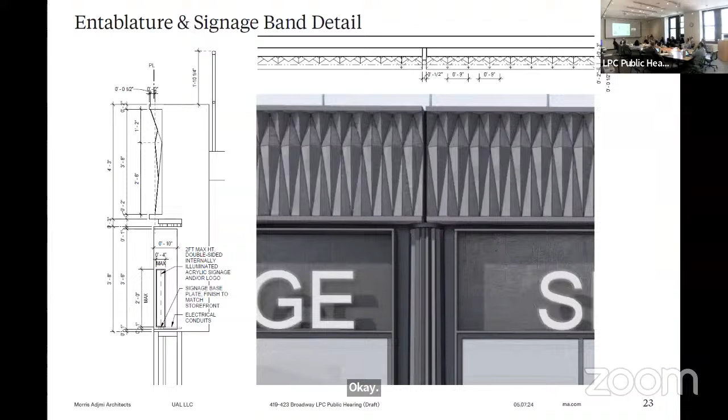It's a span, a truss, right? And those columns are sitting on existing foundation walls. Right, correct, those perimeter columns carry the new perimeter columns, will carry the storefront itself and the roof on the edge. Right, okay, thank you.

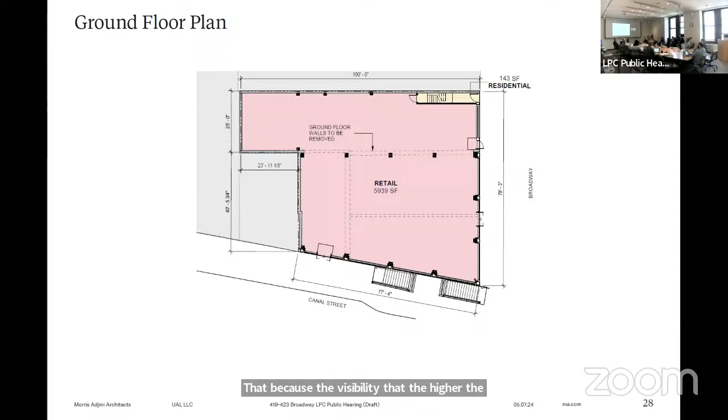Commissioner Chen? Yeah, it's obviously, I'm glad that there's improvement being made. And I think one of the observations I have for this site is that one of the problems of modern society is that we're plagued with graffiti. And that relates to the scale here, right? Because the visibility, the higher, the taller, as long as you can maintain that new band of the panel, it blocks the remaining graffiti that's on the back wall, which is very unfortunate.

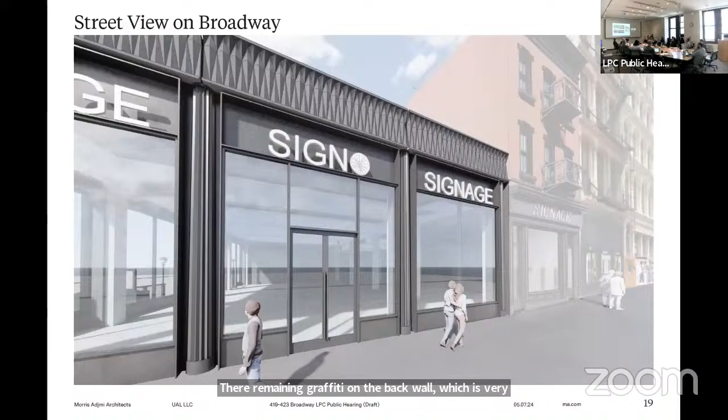So that when the commissioners comment later on about whether that brick should be painted or covered, that's something for us to consider, because, you know, if it's a painted surface, as Noble White used to say, that's going to be an issue. So I just want to bring it to the board's attention.

Okay, thank you. Any other final questions or thoughts? All right, let's close the hearing and begin our discussion. Commissioner Chapin, would you make a motion to close the hearing?

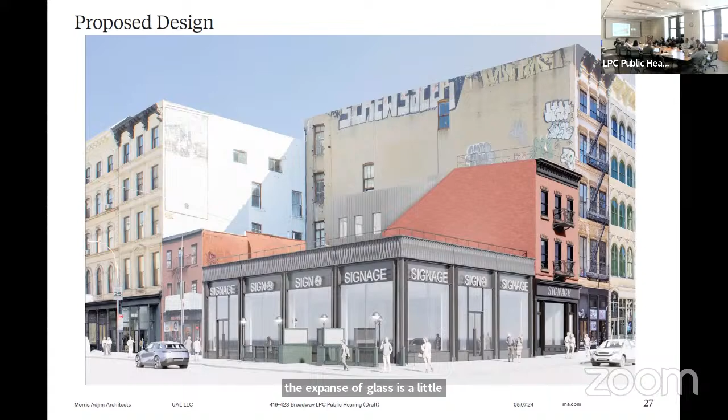I'm going to look at this from an urban design point of view. And there's a drawing, page 25, that solved the problem of this. I'm not opposed to the scale of the building. I think it's fine. I think the datums though are off. I think if we lowered the datum to align with the building to the right and to the building to the left, at least the sign datum, that would take away any discussion of anything.

The datums would align, the urban context, the corner would come alive. And I think that's fine. The amount of glass, or the proportions of the columns, it's fine. It could be looked at again. The issue I have is, what's the word they use?

Draw attention to itself. I hear this about a lot. If I look at this elevation, the diagonal of the brick and the gray draws my eye absolutely to that void space, which is nothing to look at. And it just, the diagonal itself draws attention, the formal thing. So just simplify that and don't draw my eye to it.

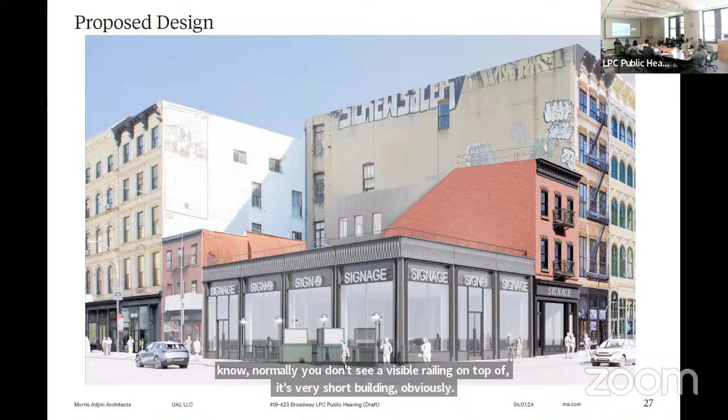I think it probably would be desirable to set the railing back a little bit, just because normally you don't see a visible railing on top of such a short building. But if it could be minimized a little bit, I think that would be desirable.

I don't have a problem with the signage or the color, and I think the design in general is well conceived to do a modern echo of the historic features in the current building. So that's fine. And I think that's a good point, that it is a contemporary building, so it can give some latitude in how it interprets the historic features.

Commissioner Goldblum: Thank you. I think it's basically appropriate as is, with the caveat of reducing the sign font size. I think the signage along Broadway should be reduced in number, but Canal, because of its character as a very raucous place, I think can take the signage. But I do think reducing the size a bit would be the better way to go. I think they said 18 inches was the staff level guide - I think that's good.

While I'm okay with the design as it is, and as others have said, it's quite articulate and, as we'd expect from Morris, very professional, sharp, interesting and a creative take on traditional architecture, I think Stephen's idea about adding a bay to the Canal Street facade would improve it. I don't think it's inappropriate as is.

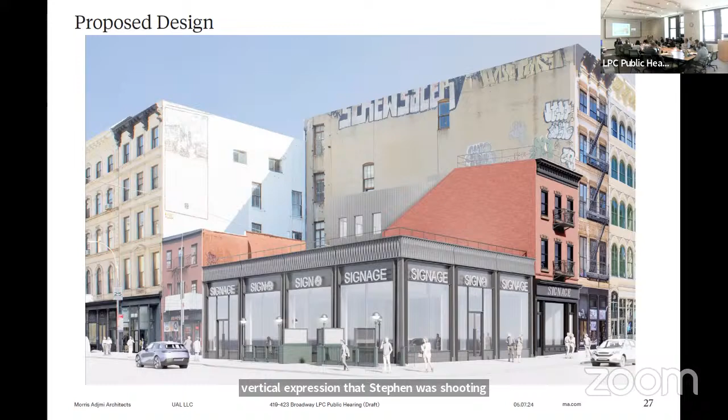I agree with his analysis that generally speaking, the rhythm along both Canal and Broadway is usually more vertical than what this is. I don't think it's a disqualifier that this isn't following that pattern, but I do think his suggestion would enhance the project if they would consider it.

One more thing - in terms of the brick building, I think it's important that the brick stays diagonal, not be removed. I agree with Everardo that it does draw your eye, but I think it's important because that's the historical volume of the building, and the recall of that is very, very important.

What bugs me a little bit is that triple window - it kind of crowds right onto it and brushes up to it. I'd say if you tighten those up a little bit so they give a little bit more space to the brick, it wouldn't look like an accident. It would look like you were interacting with and elaborating on the original building.

As we commented on 14th Street and 8th Avenue, the BKSK building with the mid-block building, where they were dealing with a lot of conjoined federal period townhouses, I think some amount of the original sidewall should be retained at the interior of the conjoined spaces. When dealing especially with a federal period building, its fabric, its volume should be retained. Normally a rear yard addition of that scale would not be approved lightly. I think here it's okay because it's been so heavily modified over the years, but the expression of it is very important.

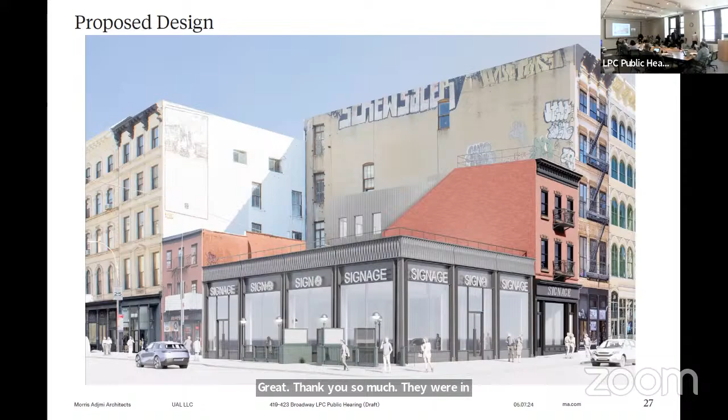That's right, literally. I'm sorry about that, Morris.